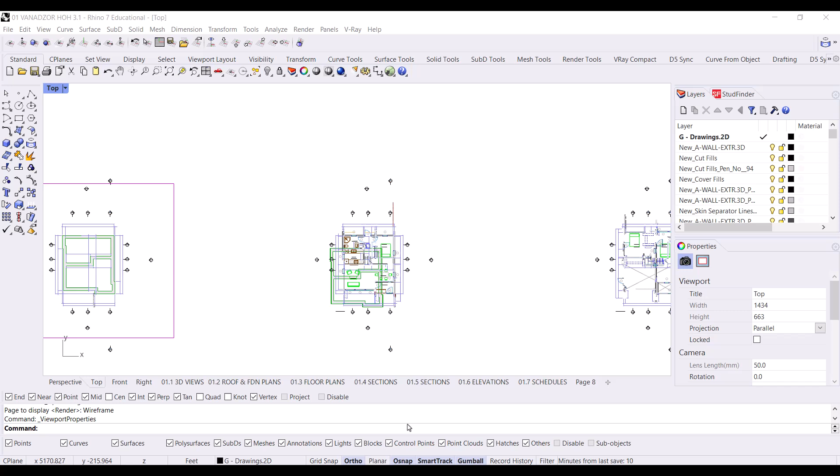All right, so in this tutorial, I'm going to show you how to take a Rhino drawing. I have some plans and sections from a project that we're going to export from Rhino to Illustrator, and we want to make sure that these are sent and printed to scale.

So I'm going to show you how to do that by setting up a layout. In Rhino, setting up a layout is kind of a two-dimensional page layout that you can export. You can either print it, or in this case, we're going to export it as a PDF with vector lines to Illustrator so that we can print this to scale.

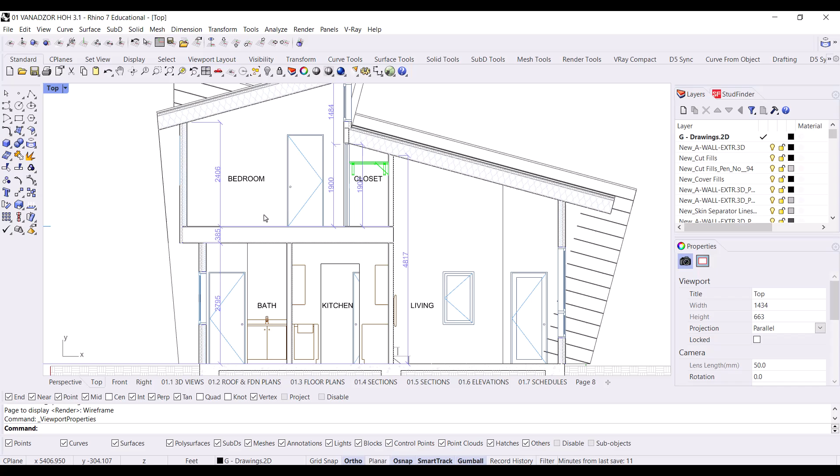So I have a drawing. This is two-dimensional. If I look at this in 3D, you'll see all these drawings are two-dimensional. All right, so I'm going to go back to top view.

Now I could either go File Print. I'll show you this in a couple ways. So if I go File Print, I can save this as a PDF. I'll set the size to 11 by 17 and make sure to check vector output.

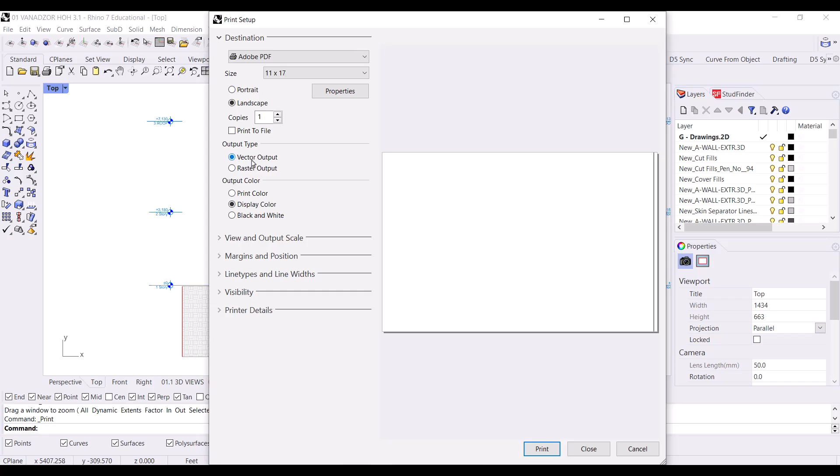And with vector, it's going to output as vector lines that can be scaled without losing any resolution in Illustrator. So make sure if you're ever printing lines and you want to be able to scale them up, or you don't want any aliasing, you want to use vector as a format.

You can use display color or print color. It's good to export these lines in color so that if you import them in Illustrator, you can select by color. So if you've been layering, if you've been setting up your layers based on color, you can control them easily in Illustrator. So I would maybe do print color.

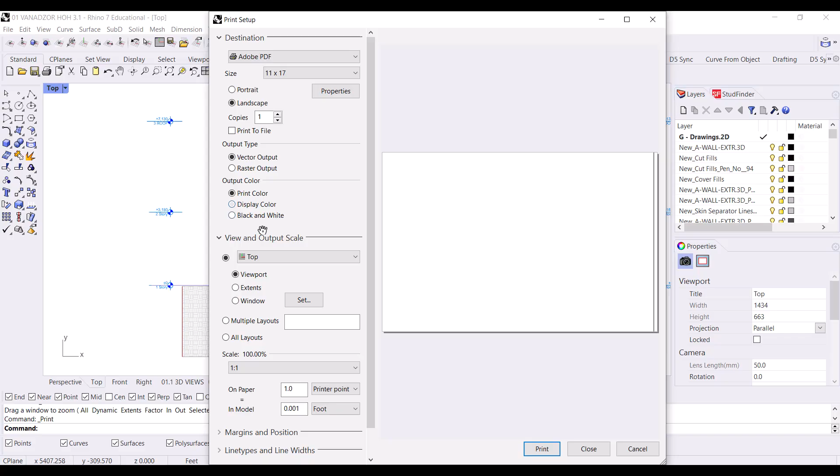Set the window that you want. So I'm going to go to window and select this region. It says change scale to fit area. For now, I'm going to say yes.

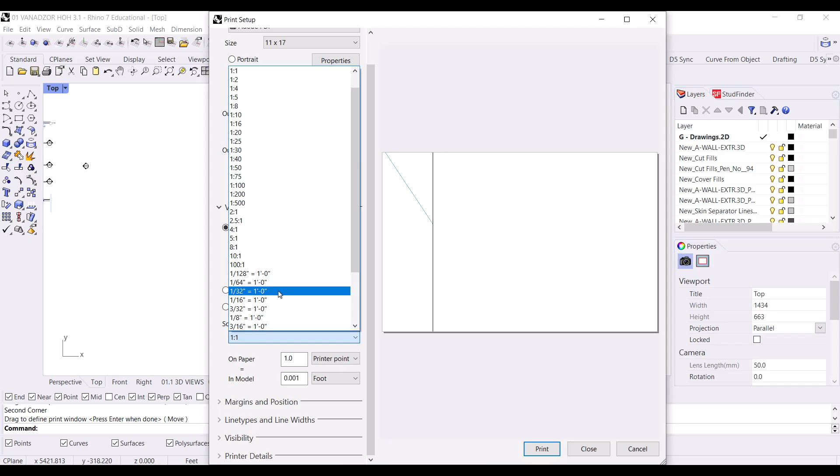But I'm going to scroll down because the scale that I want to print this at - let's see, 1/16 is too small. I'm going to set this to maybe 1/4 inch. And that scale looks right.

So what it's doing is scaling the drawing, assuming I've been drawing and modeling it at real life scale, so a foot is 1 foot in model space. Now when I print it, I can just change the scale here so that it prints at the appropriate scale. So 1/4 inch equals 1 foot, meaning 1 inch is 4 feet, or 1/4 inch is 1 foot. All right, so that scale looks good.

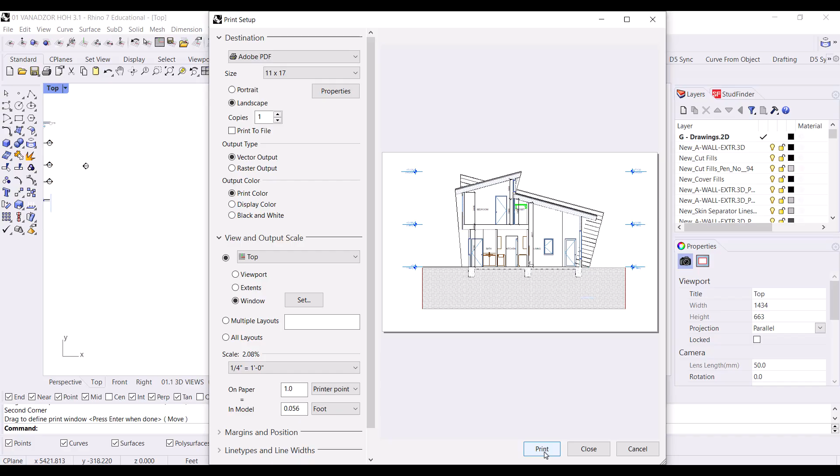And I'm going to export this, so I'm just going to hit print. So that's one method, and this method is perfectly fine. There's another way to do this where we create a layout. I'm going to show you how to do that in a second.

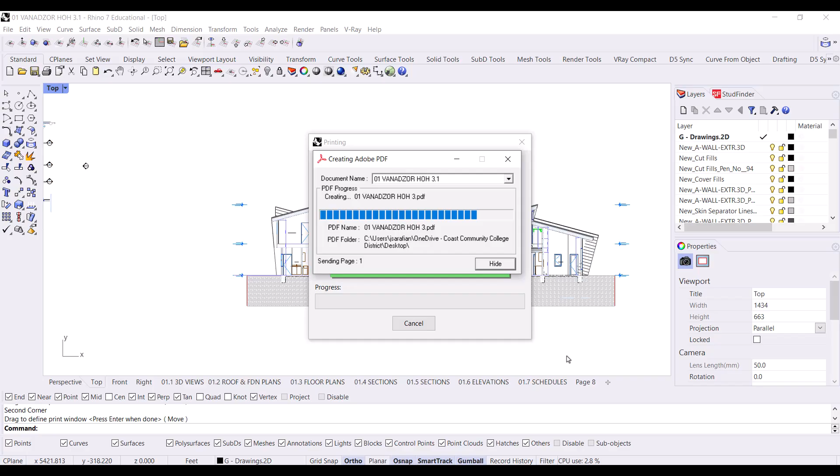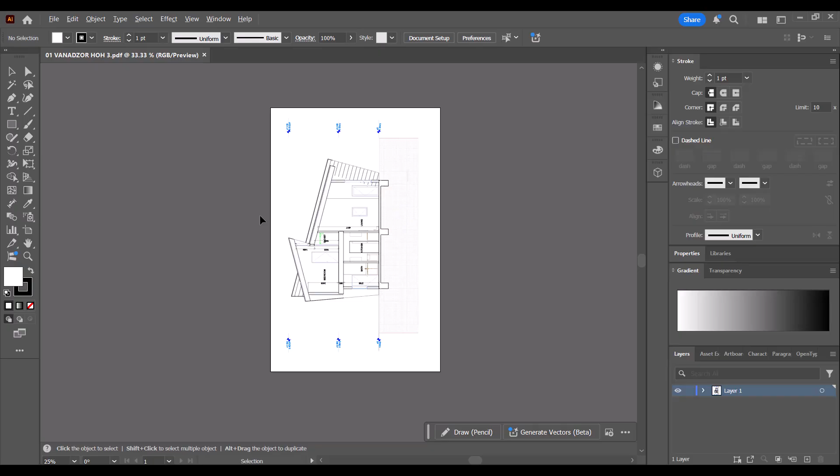All right, so once it's printed this, we now have a PDF. I can then open this in Illustrator. I just printed this on a landscape tabloid size, 11 by 17 landscape. Make sure to... so I'm going to open this.

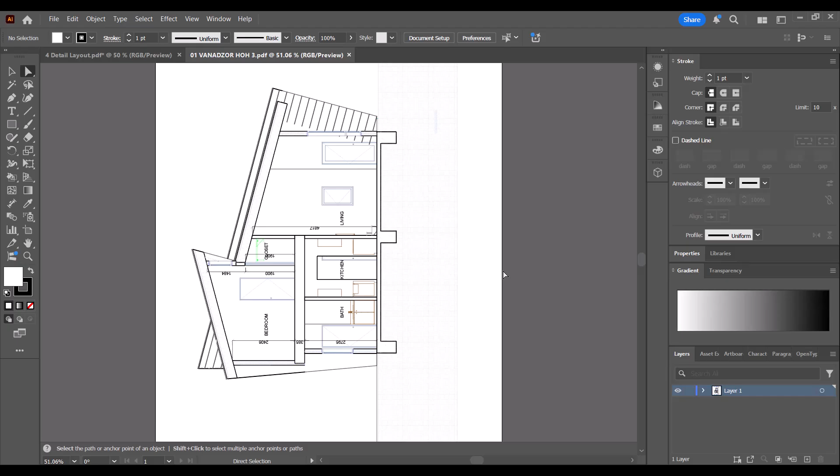You'll see that now all of this line work, it's rotated, but all this line work is editable. I can select each of these. I can zoom in as far as I want. These are all vectors, so these can be edited. To rotate this view, I want to rotate it 90 degrees clockwise. So I'm going to go to View, Rotate View, -90, and that'll rotate the entire artboard and content 90 degrees.

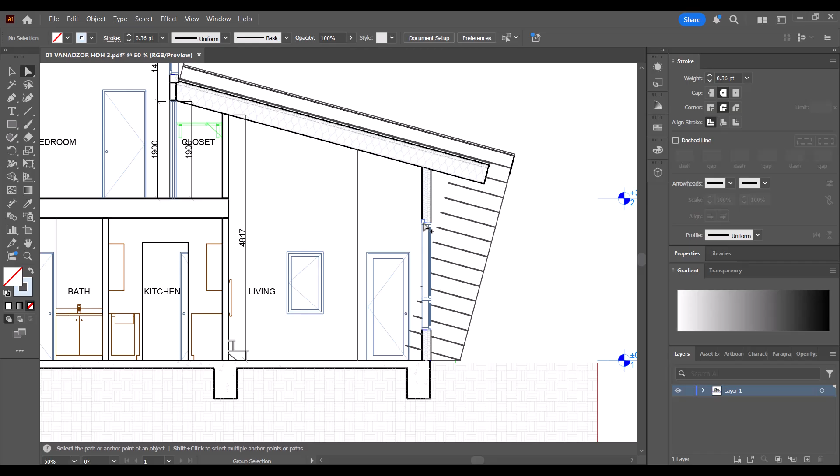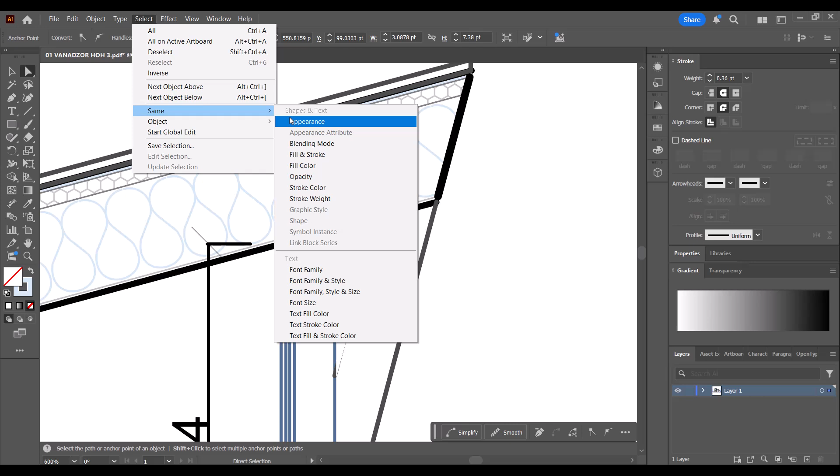All right, so now that I've imported this into Illustrator, all of these lines can be edited. It's all on the same layer, which isn't great, but you can select by color, you can select by line weight, you can select by fill. So you can use that to help differentiate different layers. So this insulation, I can select this and say select same stroke color, not fill color.

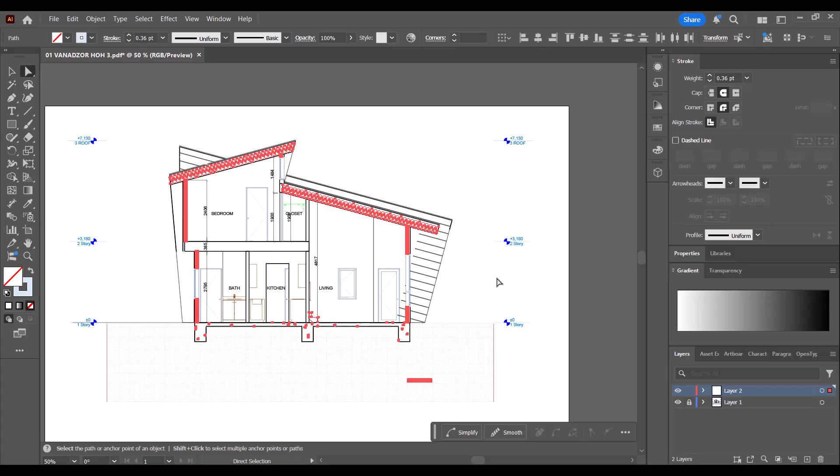Select same stroke color, then I can Control X to cut it, create a new layer, lock the old. With that new layer, Control F to paste in place. So now that insulation is on this layer that I can turn on and off easily. And if I want to select everything on that layer, I select this little circle to the right, which lets me select everything that's on that layer.

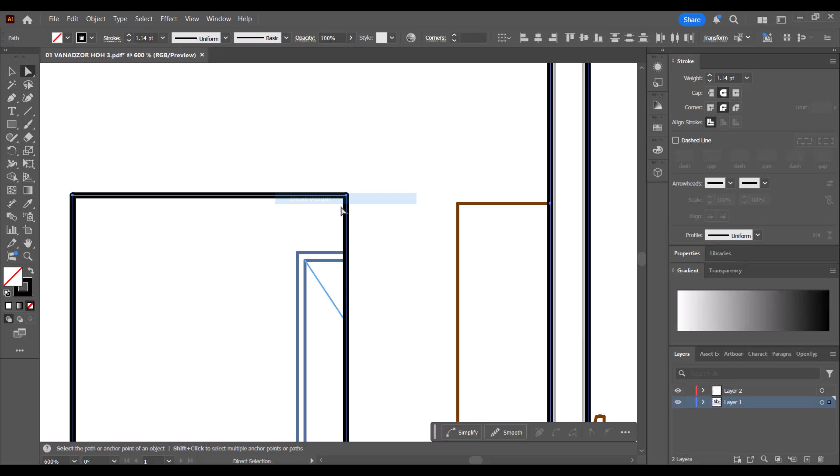You can do this for various line weights. Let's say I want to select everything, unlock this, select everything that's that line weight, select same stroke weight. So this is everything that has a heavy line that I'm cutting through. Control X, new layer, lock these so it doesn't get confused. Control F, and now that line work is on this layer that I can toggle.

So with that, you can select everything that's on that layer. You can change the line weights. You can do a live paint. A lot of editing can be done here.

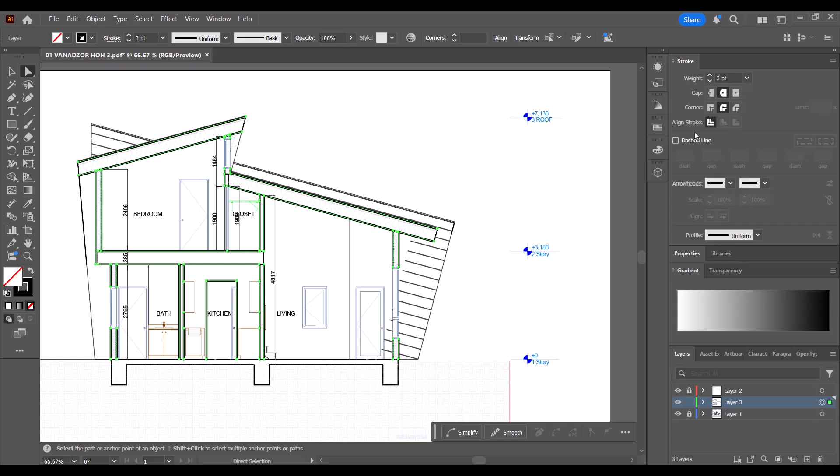All right, so that's one way to export from Rhino. The other way is to create a layout. You've probably wondered what all of these are if you've never used them, but these are all different layouts.

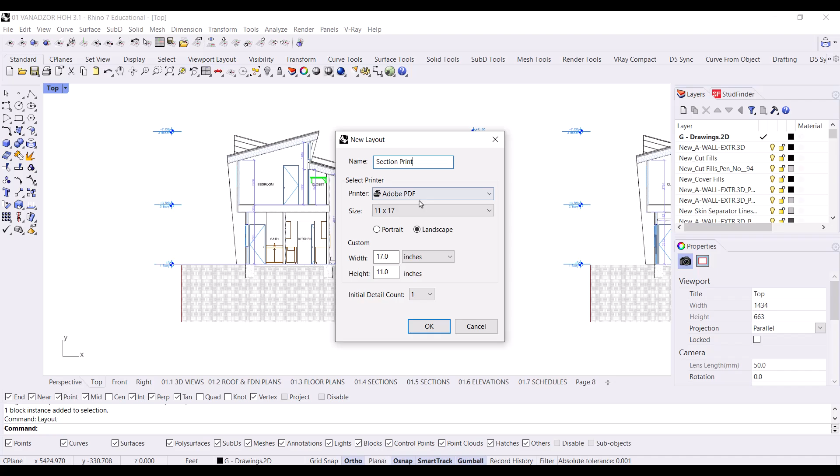You can create a new one by just typing layout, enter. You can set the page size. Again, I'm going to go with 11 by 17 landscape. Set it to landscape, and we'll call this section print. Make sure it's set to Adobe PDF and hit OK.

And what it's doing is it's creating a two-dimensional spread. And I could, if I had told it to create 4 details, it would give me 4 kind of view windows. With these view windows, I can double click in them, zoom in, double click to get out.

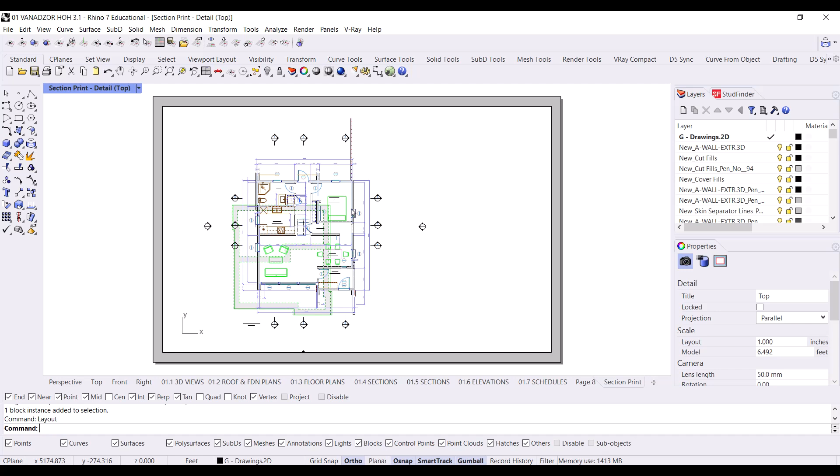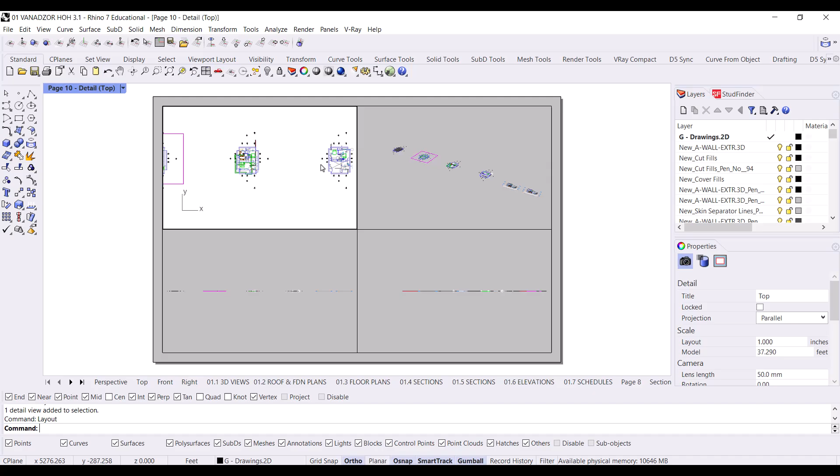Let's create another layout just as an example. So if I had told it, give me 4 details, now I have 4 kind of windows that I can set up. So let's say I have my floor plan in this one, double click. This is perspective. I want to be in top view. So I will set this view to top and then zoom in on the section that I did. Double click to get out.

So this gives you different views. Again, set this to top. So I can have a kind of a multi-spread print by doing this. If you have a detail of the project you want to zoom in on, as well as showing it in plan and section, this is a good way to create multiple spreads.

If I wanted to show the roof plan here. And you'll notice I was just kind of zooming in arbitrarily. If you select these, on the right here, this is a scale it's showing you. So right now this is just whatever scale that I was zooming.

Let's say I wanted to go 1/8 inch scale. I would set this to 8. So 1 inch on the page equals 8 feet in the model. So that's 1/8 inch scale.

You can double click on this. Actually, just single click. So this is a polyline that I can edit. So if I wanted to change the size of this kind of view, this detail border here, I can scale it that way.

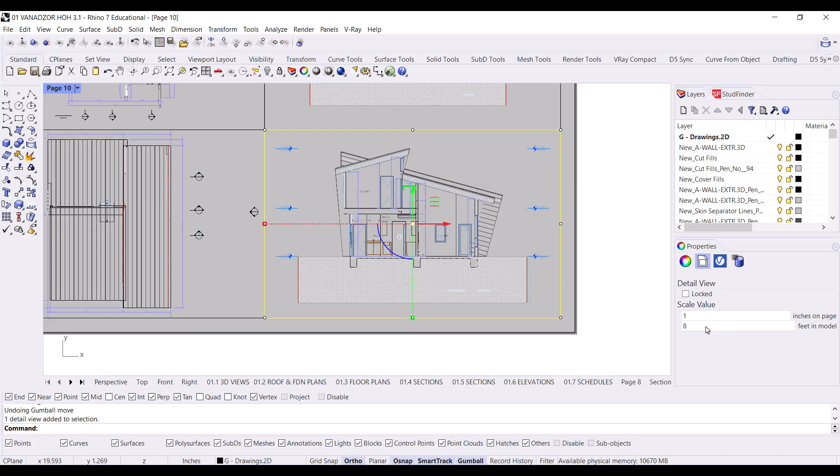But I'm just going to single click, set this to 1/8 inch scale, single click, 1/8 inch. I wouldn't recommend doing your boards this way, but this is a useful tool to print multiple views of something in Rhino. You can use a 3D view as well.

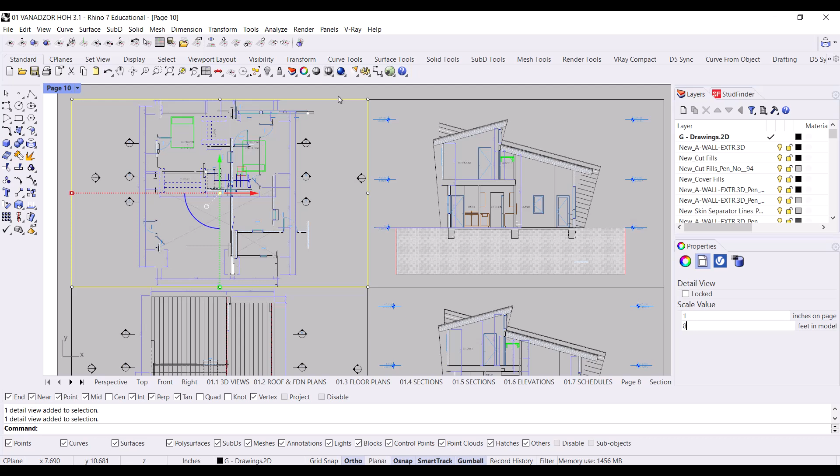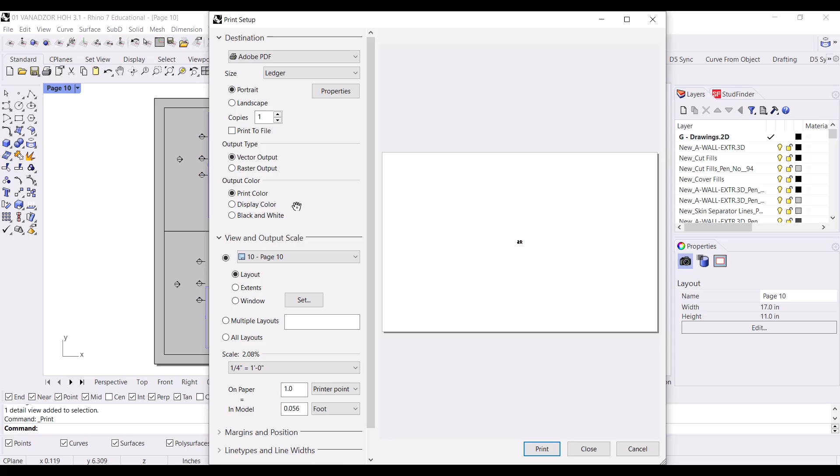So again, I can print this, but same thing, I can print this layout. So Control P, I'm going to make sure the viewport is set. So right now this is page 10. But since I've already set the scale in the viewport, I don't need to change. I don't need to print it to scale, right? This doesn't need to be 1/4 inch.

This is going to be 1:1 because the scale is already set. So I set this to 1:1, and now it's going to print at the appropriate size.

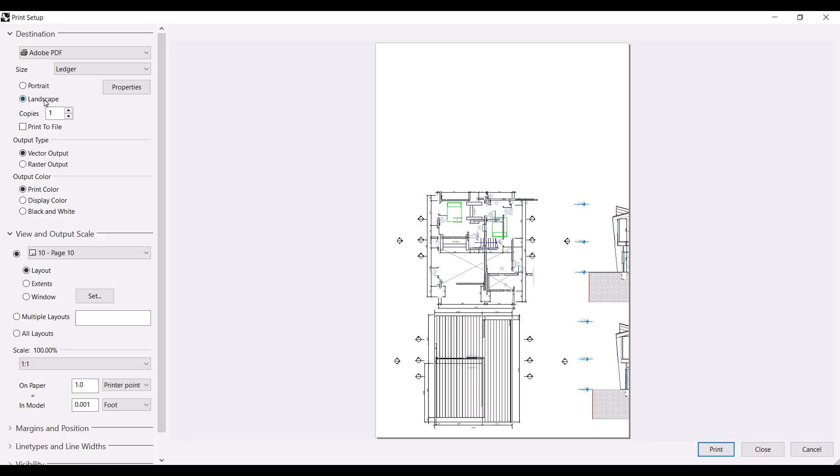And like before, I'm going to keep this at vector, print color, size, ledger. We're going to set this to 11 by 17, landscape, PDF, 1:1, and now we can print 4 detail layout.

So if you need to print something quickly and kind of look at it, or maybe you're doing an entire presentation in Rhino and you don't want to spend time going into other software, this is one method to do it. Rhino has a whole suite of drafting tools that you can use for this purpose, and you can do hatches and line weights and all that in Rhino. It can be difficult, but it's certainly doable.

In this case, I had everything drawn two-dimensionally, all flat on the XY plane. But if you're showing a model in 3D, you could also have a 3D view in one of these viewports, in one of these details.

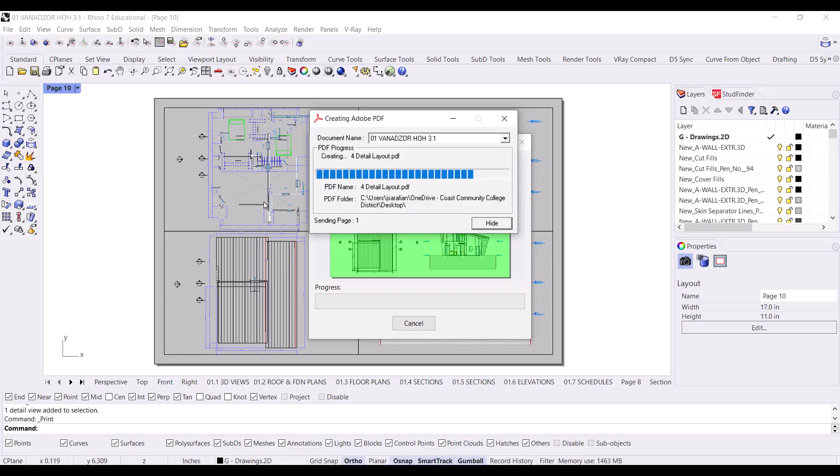So it's giving us a preview of that PDF, and again, this is all vector, so I can open this up in Illustrator. Same thing, I'm going to have to rotate it.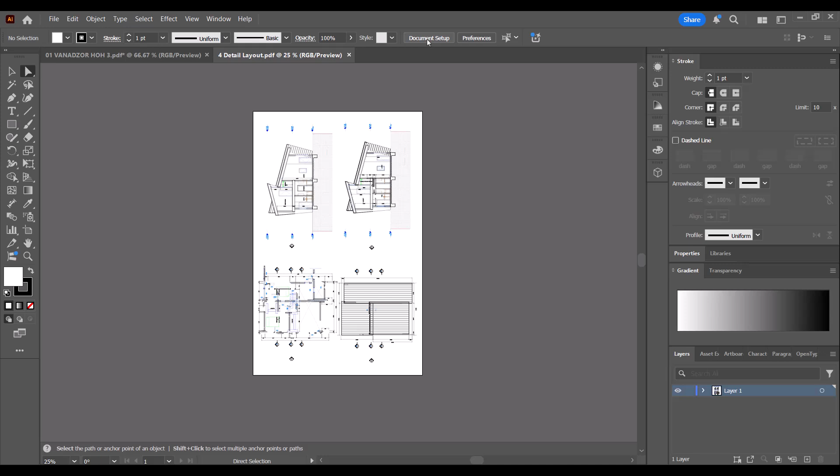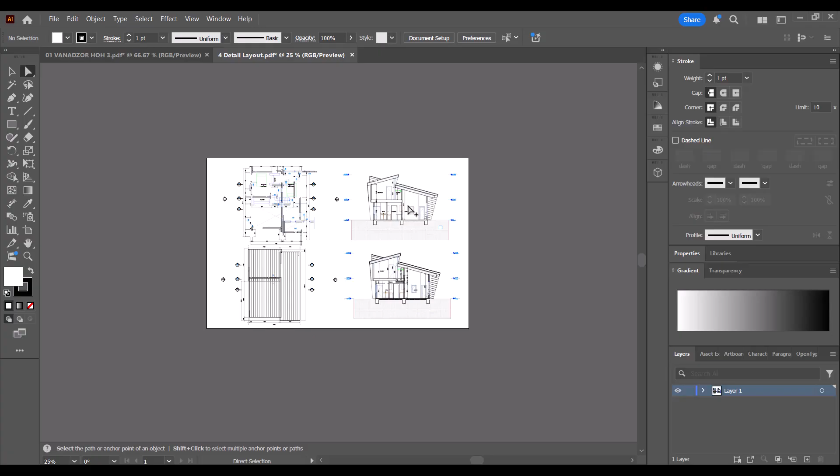I'm going to set that to landscape, hit escape, Control A to select everything. I hold Shift to lock it at 90 as I rotate it. And you'll see, I'm cutting this off a bit. This isn't ideal, but from here I can now edit the line weights, and I could do a live paint if I needed to.

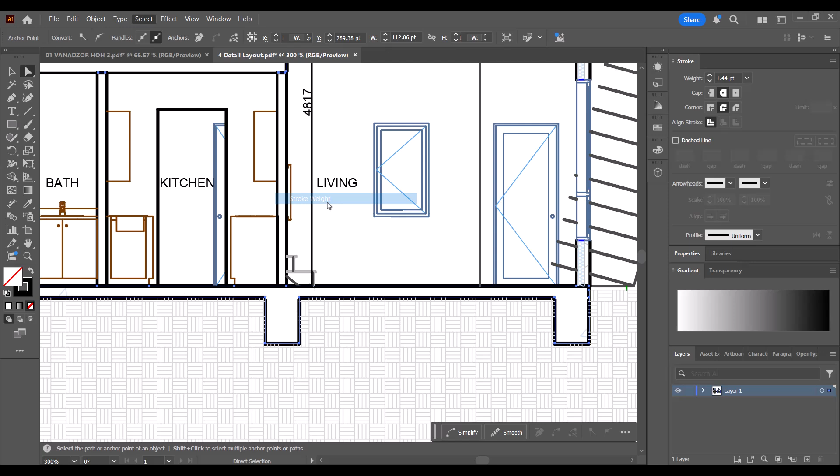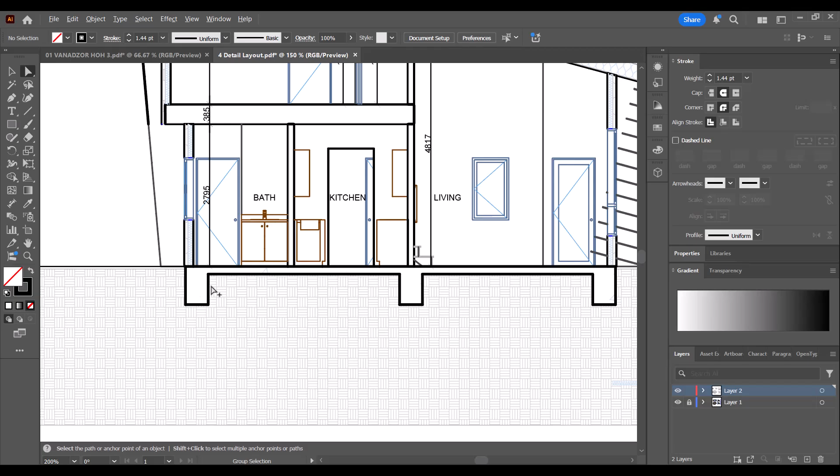As a recap, if I wanted to live paint this slab, I can select one of the lines, because I know they're all grouped based on their line weight — everything that's concrete slab is going to be the same line weight. So I select that, select same stroke weight, cut it with Control X, create a new layer, paste it with Control F, and then go to Object, Live Paint, Make, and now I can live paint that slab.

The live paint tool is actually behind the shape builder tool, so you have to hold that down to get to the live paint bucket. Either set the color you want, and now I can go in and live paint.

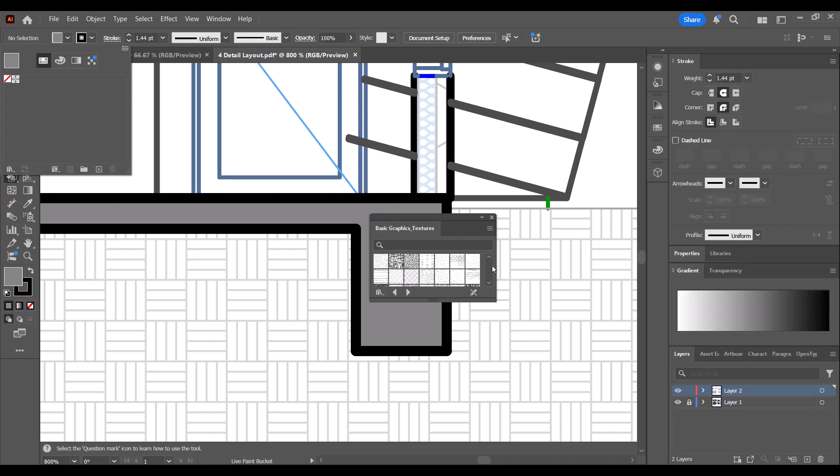There are other hatches you can use for texture. To get those, click on the fill dropdown, there's a little library menu, go to Patterns, Basic Graphics, Textures — though this is always way too small, but you can kind of see the different patterns we can use.

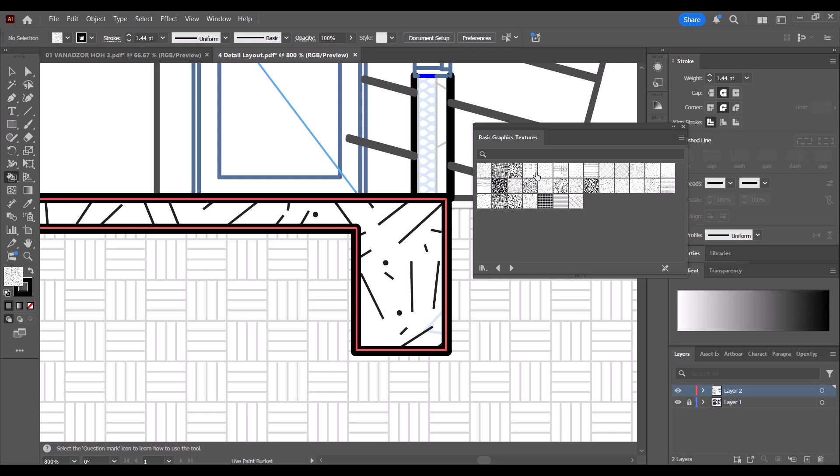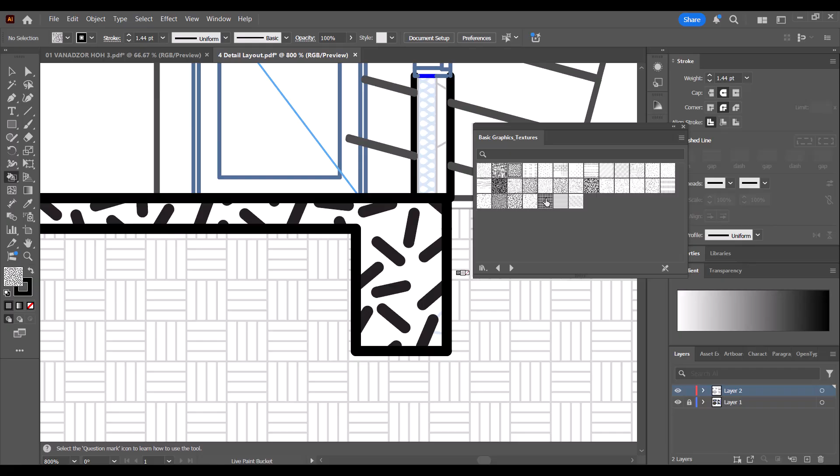There's nothing perfect for concrete — that's more of an earth texture, and I can barely see these. But you can test out different hatch patterns. Again, with concrete there really isn't anything perfect here, but there are various patterns. If you have earth hatches and things like that, they're a little bit better.

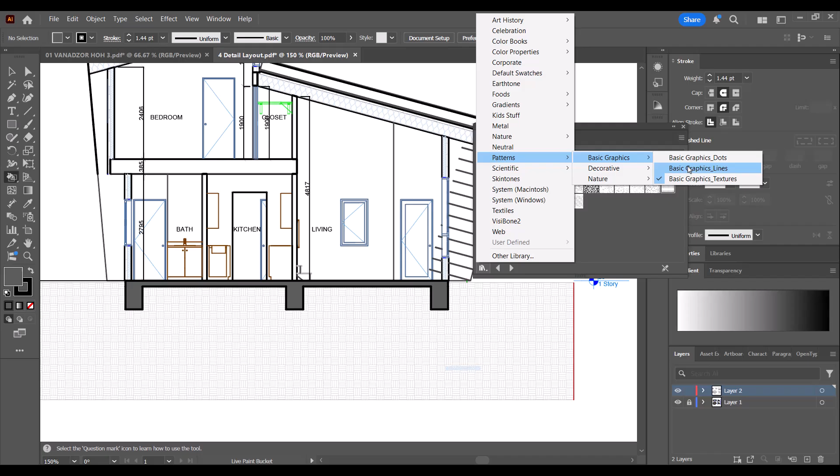I think the best option was just the solid gray, but just know that there are textures available. And if I go to Patterns, they also have lines as well — various line patterns. Use something that's appropriate for your drawing and matches your goal.

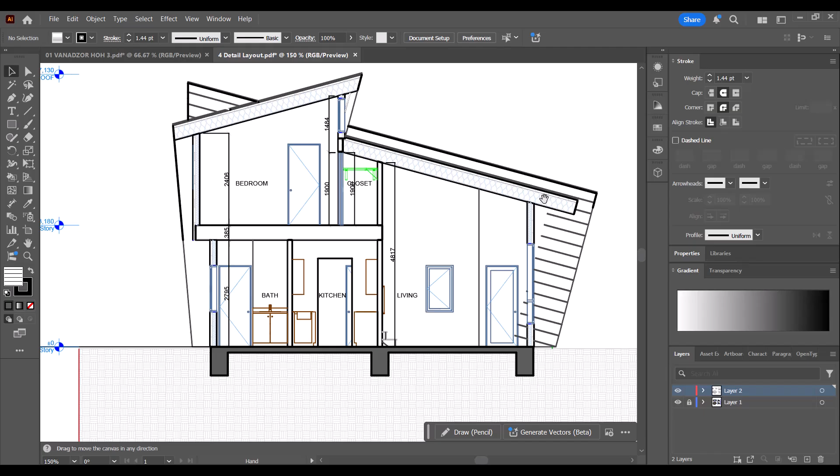You can also do hatches and things like that in Rhino. So that was a multi-page layout. You can also do this for a single page layout. We were doing this one, and we wanted this to be a section.

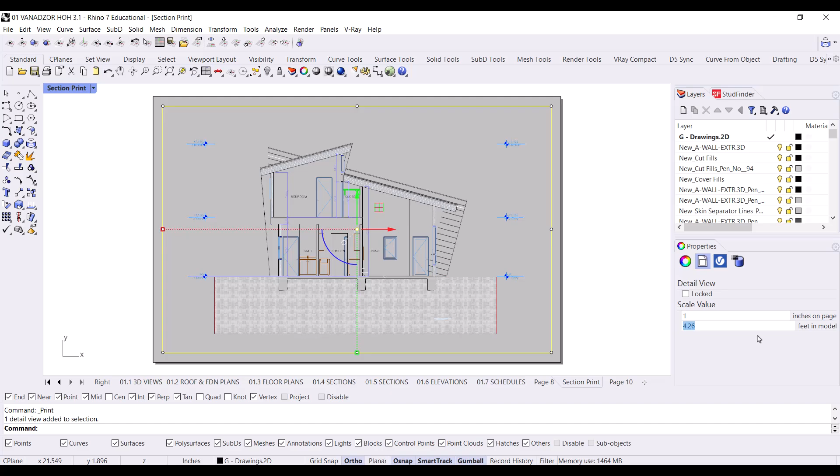I'm going to double click, find my section drawing, zoom in to get it close, and then I want to print this at 1/4 inch, so 1 to 4 — meaning 1 inch on the page is 4 feet in the model. So that's now the right size.

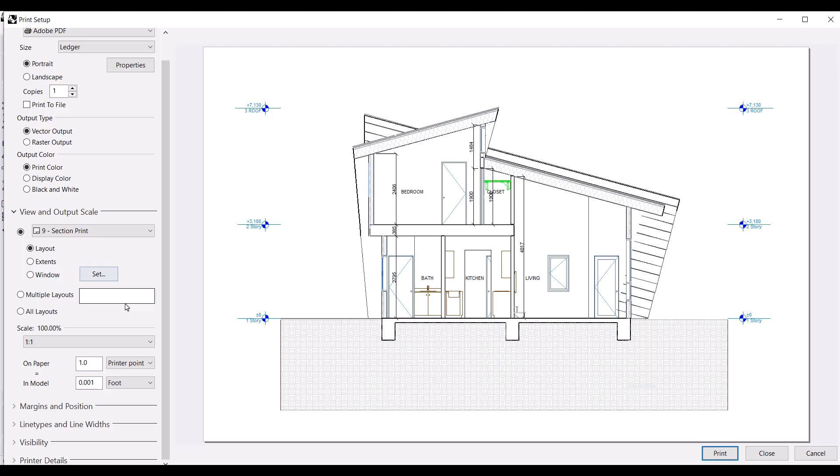Again, when I print a layout with Control P, since it's already been set to the right scale, I can just leave this at 1 to 1 and print it. Maybe I'll leave this at ledger and portrait instead of 11 by 17 and landscape. Keep it vector, color, make sure it's the right view, and then hit print.

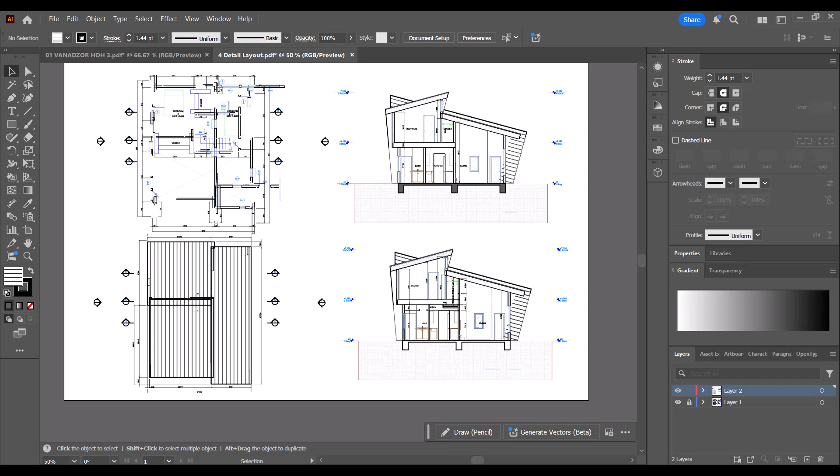Again, you don't have to use this page size — this is just what I'm using in this example. If you have larger drawings, you can use Arch E or whatever page size you need, like 24 by 36 if you're printing that. So in Illustrator, File, open up the section, and there I have it.

Again, as a PDF with vector turned on, all of this is editable — these are all vectors that can be edited.